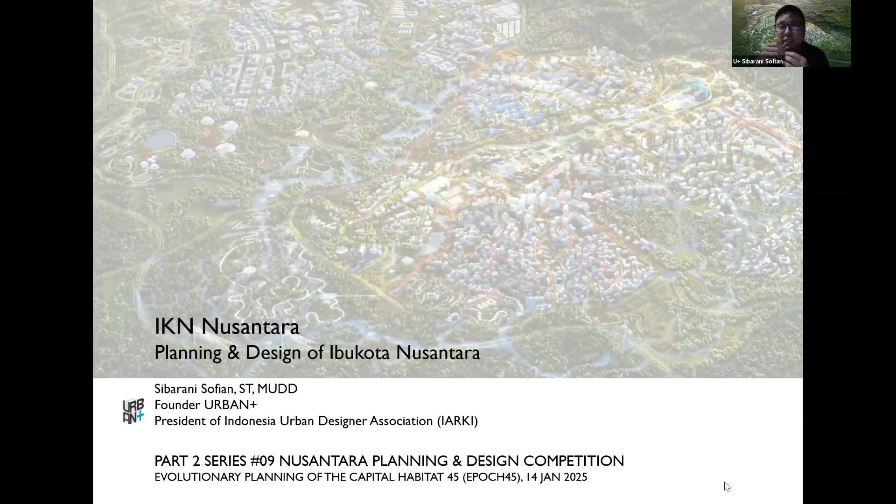Thank you, Neville, and hi everyone. Thank you very much for the opportunity, and hello Bu Wiwi, and also all the other participants here. Thank you for the generous introduction, and I hope I can fulfill some of the requests that Neville just mentioned.

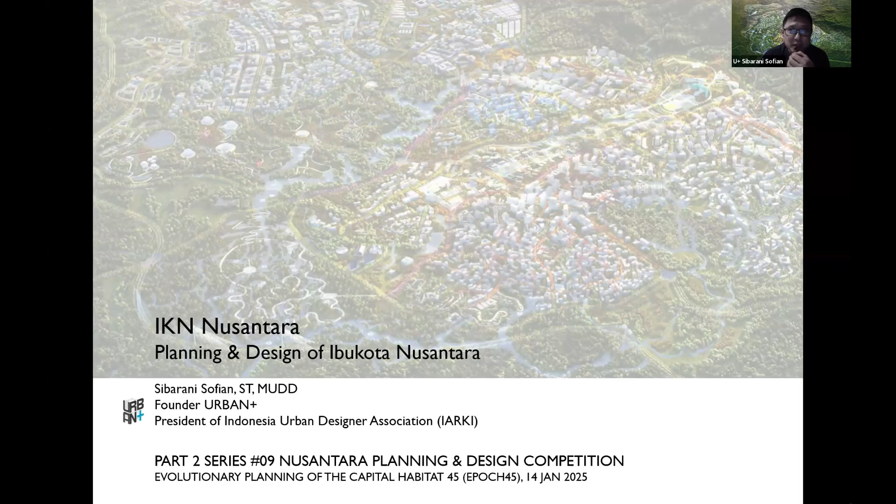I believe some of you probably this is not the first time to look into this presentation, and I hope this is not going to be too boring for you because I've been giving this type of talk for quite some time. It's been 5 years since we entered the competition and won it, and I think it's been a great journey for all of us as a team. Personally, when we won the competition and seeing some things already progressing - I hope in this opportunity I can share with you the planning and the design, and how much it has been transformed into what has been implemented on the site.

Without further ado, I'll probably skip through some of this pretty early information. I think we all know the location and also why the government is thinking of moving this into the more central and less Java-centric location of Kalimantan.

For our former president, Joko Widodo, it's not only moving a capital city, but it's also a transformation of the civilization. So we look into the Indonesia Maju, or Forward Indonesia 2045, where we foresee ourselves to become a developed nation by then.

This capital city is part of the effort to transform the society - not only the physical things, but also the society of us Indonesians - towards the goals of a forward-looking nation. It's based on three pillars, reflecting national identity, which I think is part and parcel of what the capital city is all about.

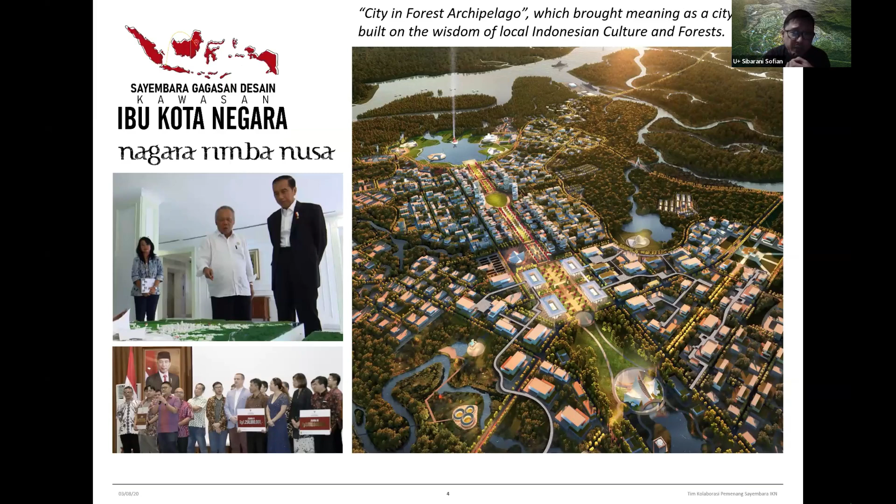They are all the KPIs that become the brief for us. It's almost like when we are architects and planners, we were given a brief by the competition that we have to achieve all those. And this is the competition entry that we were selected for and we won, and also won numerous awards after that.

Just to give you an idea of the second and third entries, and also the original TOR provided by PUPR, similar brief, similar target, similar KPIs, but it can be very drastically different. The right corner image is from the second winner, the Infinite City, from the Cornell University team, and the bottom right is the third winner, which has elements of Harvard graduates and alumni as participants.

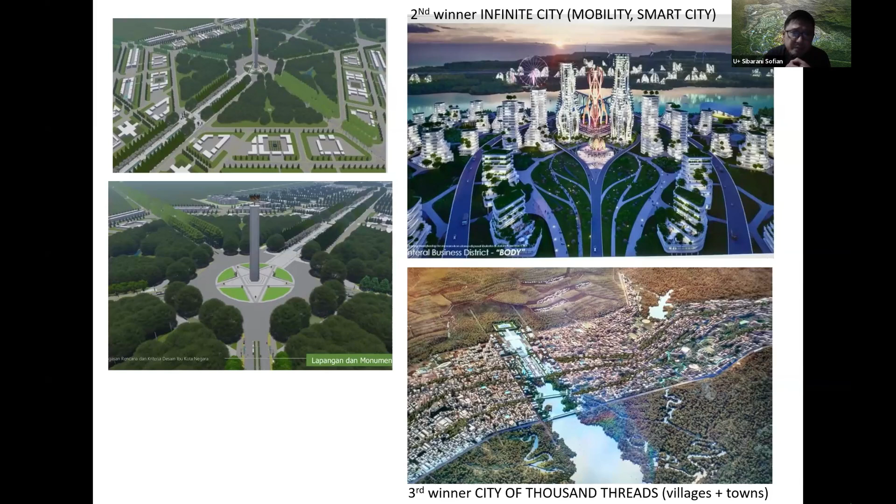So if you look at it, it's the same brief, the same capital city notion, but translated in a very different way. What I'm saying is, within the same parameters, we can come up with various designs and solutions. One of the solutions we made was trying to translate those targets into a physical plan that can be implemented in a certain way.

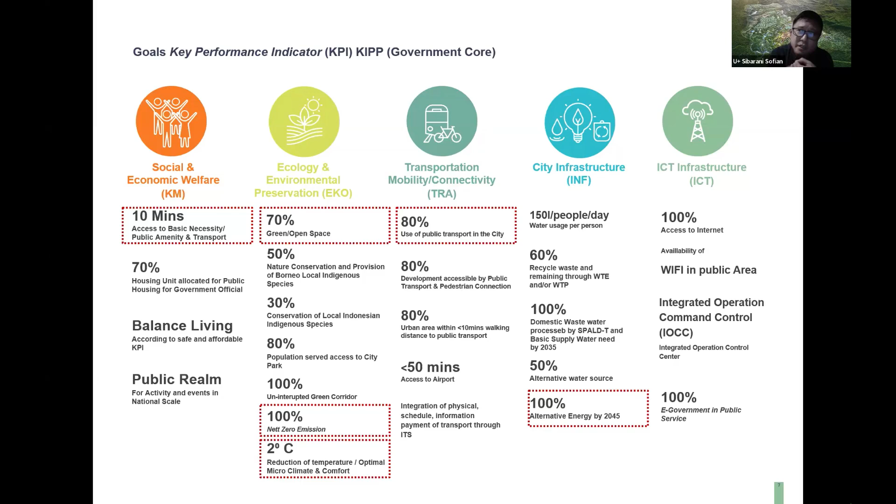So it has a very ambitious and high standard that most cities in Indonesia, if not in the world, have not really achieved. This is almost what I call utopian targets—targets far in the future, but we are striving to get there, and we'll see how this relates to what it's going to look like, and how we embed all these targets into the physical transformation and physical attributes of the plan itself.

Within this talk, I'm going to cover two different areas: one is how to interpret the vision, goals, and targets—the KPIs—and how we respond to nature. Our scheme is called Nagara Rimba Nusa, which is now pretty much translated as Nusantara. It's essentially a city situated within nature or forest, in a constellation of the archipelago.

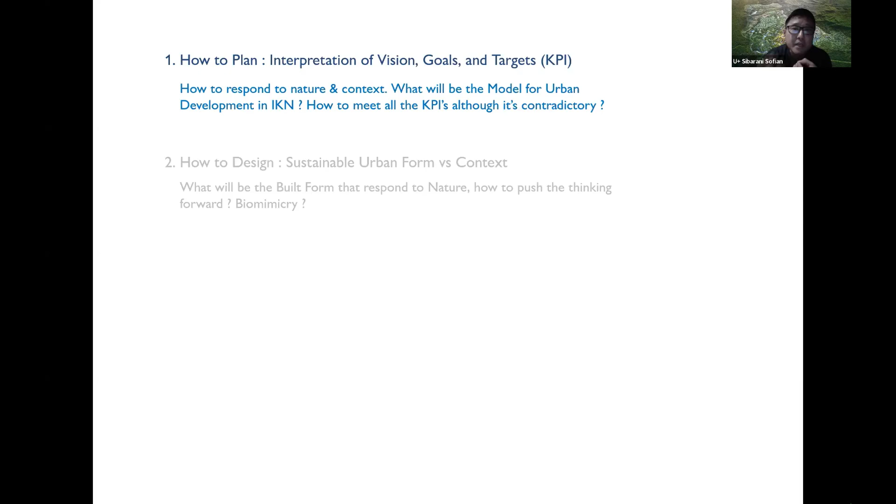So within that, we talk about the model for urban development in the IKN, and hopefully this becomes a model for the rest of the cities in the IKN, and also a model for other cities in Indonesia to be inspired from. So then how can we talk about the KPI that doesn't always correspond similarly with others, because some of the KPIs contradict each other. Later on, I'm going to talk about the sustainable urban form in context.

So by looking into the contour here, our first principle is to be sensitive to it. We need to be able to preserve as much as possible, especially the high points. We don't touch the high points, and we also don't touch the low points.

We keep most of the riparian areas, and you probably can see in recent YouTube videos that there's already a lot of waterway within the capital city. That's the result of our approach - we don't want to build on the area that is meant for water, and that also becomes a solution for us to keep a lot of the water as storage.

The third approach is the road network that is responsive to the topography. This is something that may be more similar to Bandung Utara, North Bandung. It's not really like Jakarta which is flat - it's probably closer to Bogor or Malang. The road system has to follow the contour instead of going against it.

So we are doing as much as we can to connect them, interconnect them, because remember, one of the KPIs we have to meet is the efficiency of public transport. So the road has to be interconnected, but the network is not necessarily always grid or rectangular - it's more meandering, creating a lot of curvy roads that become part of the character of the capital city now.

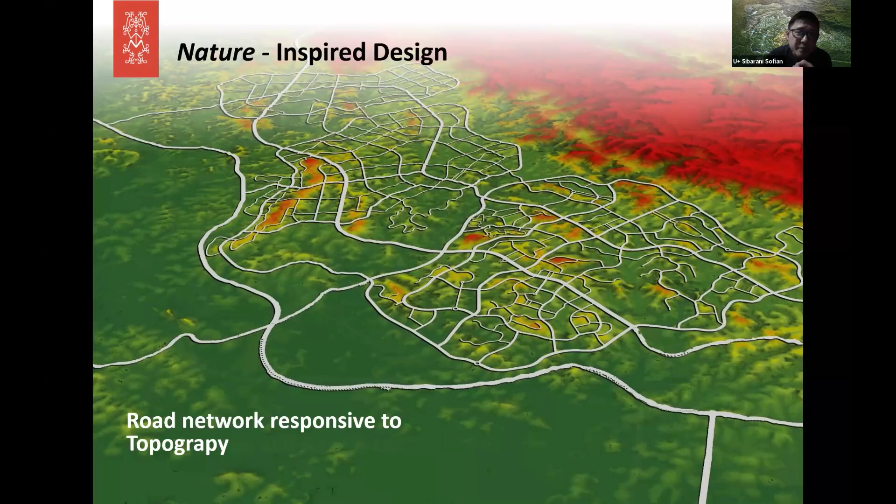We also try to put in certain structures - structures celebrating key spaces where we celebrate the relationship between man, nature, and the higher being, something inherent to our culture. This is something we can find in Bali, in Bandung, in Yogyakarta, in many parts of Indonesia. This wisdom has almost become universal, and that's something we also want to bring to the capital city.

So we have the notion of the axis, which one may relate to Washington DC, Canberra, or Putrajaya. It's become part of the tradition of the capital city to create a certain level of axis, somewhat related to power. But here, it's not necessarily all about power - it's also about the relationship between man and the higher being, man and nature, which in Bali is called Tri Hita Karana, and in many various cultures in Indonesia there is certain belief systems like that too.

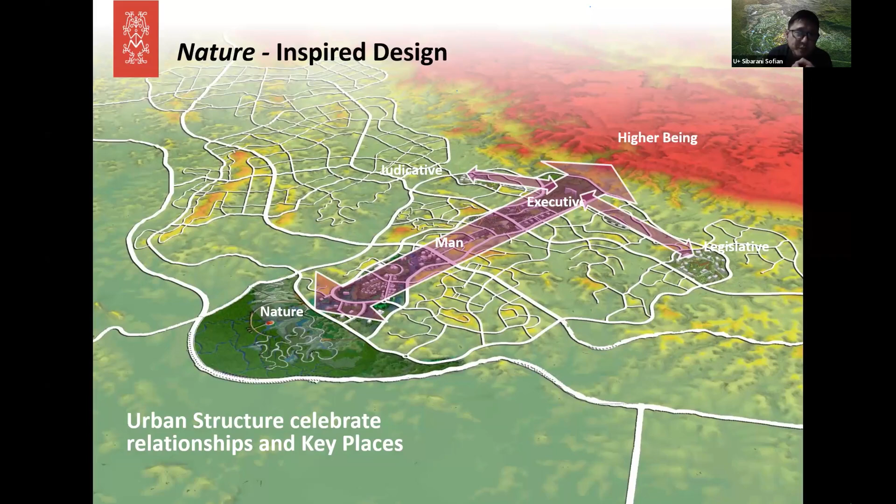And then we go into the next level of the green corridor, which tries to keep as much as possible what we call the flora and fauna corridor, to make sure that even the animals can still have a place to roam around the city. This is something that is missing in our main cities nowadays, because we tend to destroy this sort of ecological corridor, and we've already missed that.

We translate into an even more refined network of green fingers, where we identify most of the riparian areas—the low-lying area you saw a couple slides before—that's something we also want to keep. By doing this, we create almost a constellation of islands of development surrounded by green. This can help us translate the KPI of 70% green area and only 30% developed, because it can be achieved in the form of this organic network.

One can also argue you want to create more green cities by creating a big park in the middle, surrounded by development, like Central Park in New York. But we took the decision to make it more natural because we really want to preserve the environment, and by doing this we can also save a lot of costs of not filling and cutting the land.

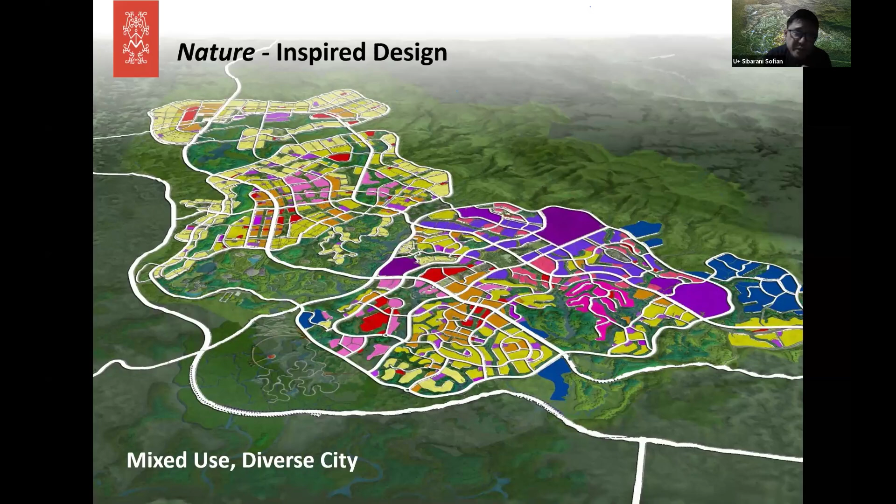I want to mention the contradiction between one KPI and another—for example, the 70% green area, which is very different from our normal city. A normal developer-made city, like Bumi Serpong Damai or Citra Raya, is mostly developed—60% developed, 40% undeveloped. Here it's 70% undeveloped; you only live within the 30%.

But then you need to reach all basic necessities within 10 minutes. How can you do that between one place and another if you have 70% green area separating you from place to place? So that becomes a contradiction.

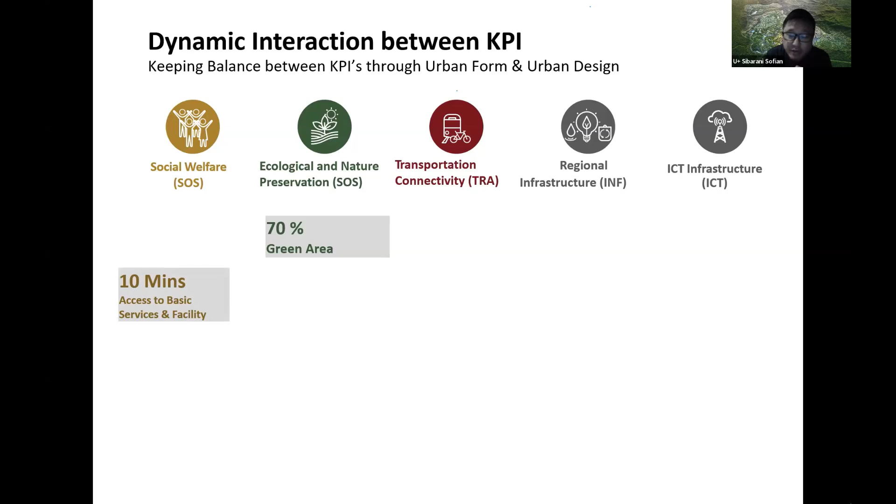And you also need to build an 80% public transport modal share, meaning 8 out of 10 people use public transport—that's another difficulty. If we have so many open spaces intertwining, how can you bring people closer within that 500-meter radius and expect them to walk to and effectively use public transport?

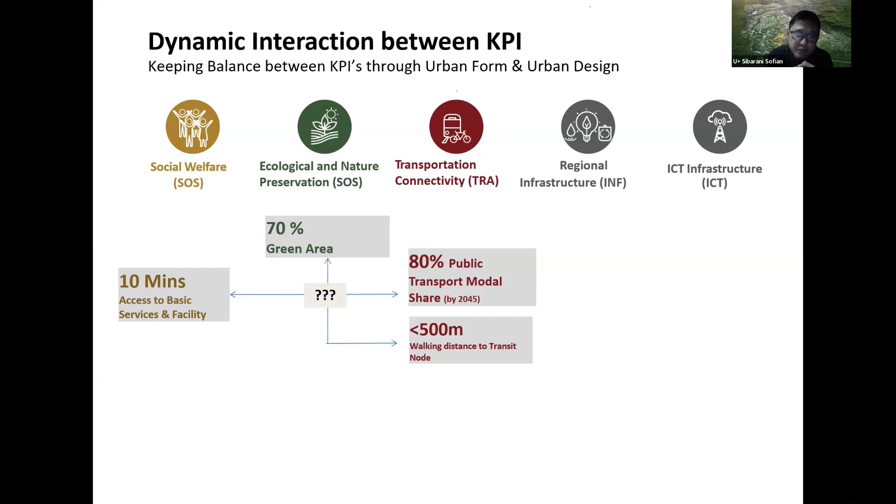So that needs a certain level of rebalancing and adjusting—you need to strike a balance between density and optimal walking transit distance. And we need to be able to measure it. It's not just empty words or an aspirational target; we need to model it and prove that people can really still walk, although separated by a lot of greenery.

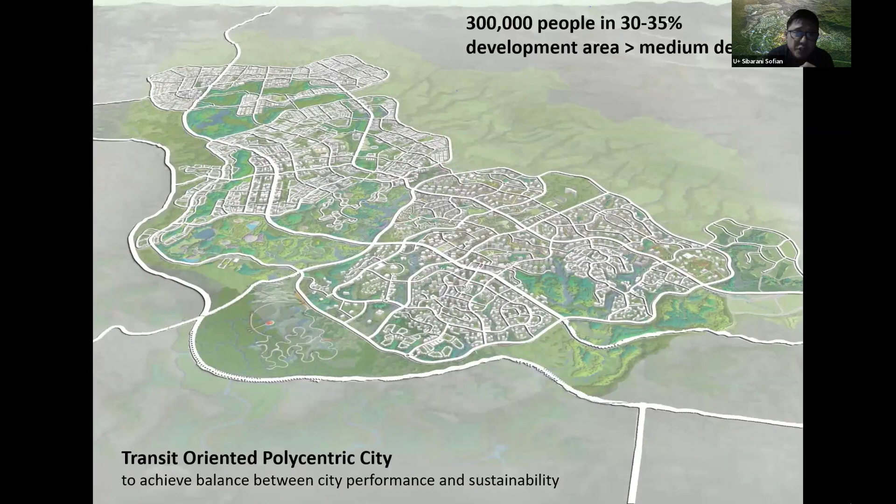So we came up with what we call a transit-oriented polycentric city, combining transit-oriented development with a certain level of polycentricness across multiple nodes. We start with having all public transport routes circulate effectively everywhere—not always straight, but roaming within that parameter. We put in the 10-minute transit radius and build density around it.

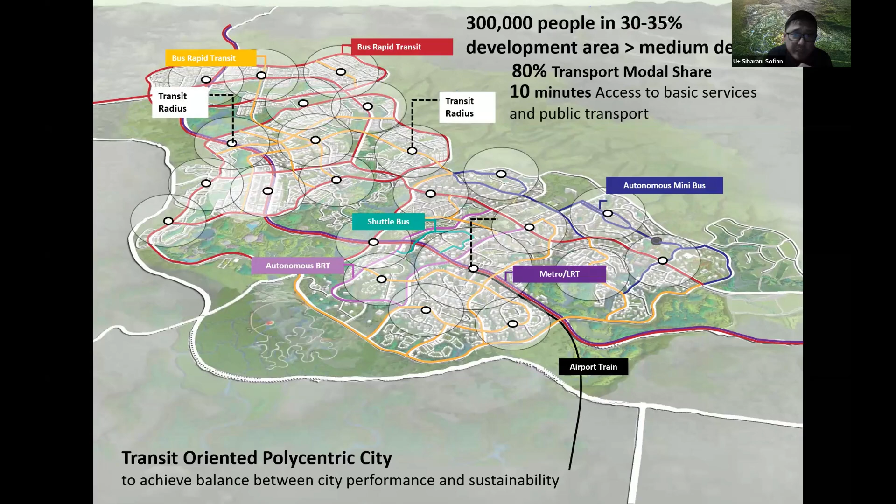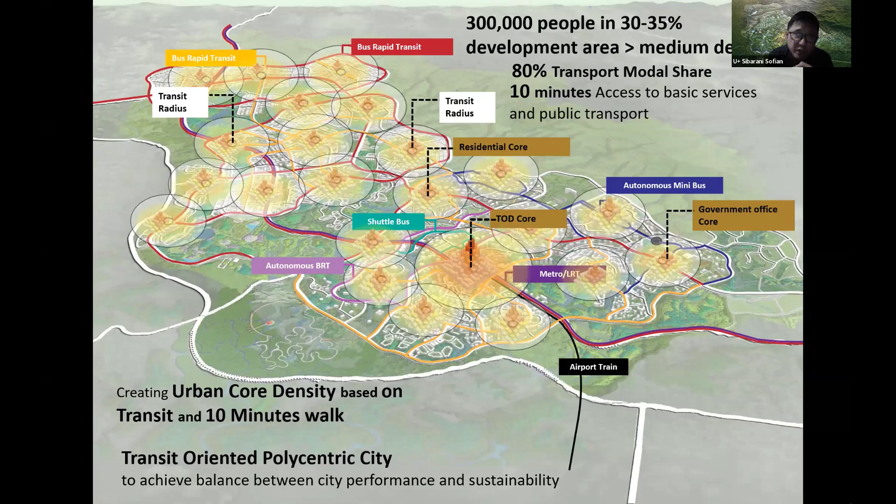We start with public transport first, build density around it, and only then think about the suburban approach. We try to avoid the suburban approach, though we still have to accommodate it at some point—but the majority of development has to be within the transit radius. We incentivize more walking within that radius, promote public transport, and try to limit private vehicle ownership by cutting down the number of parking garages, for example.

That became part of our strategy to create a development we call the 3D: density, design, and diversity. We try to create a 10-minute livable city within the radius of each of the clusters. By doing that, we hope to put pedestrians and people first above motorized vehicles, which consume the most energy, whereas pedestrians create a better lifestyle, healthier, and lower cost.

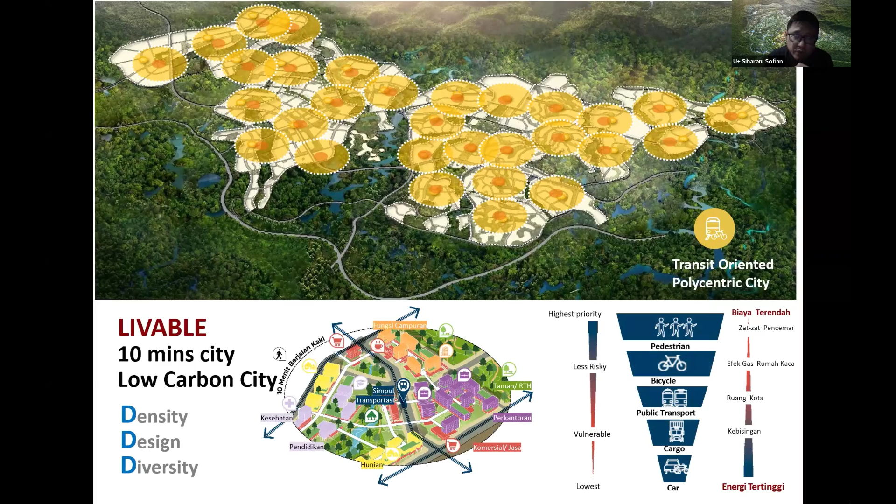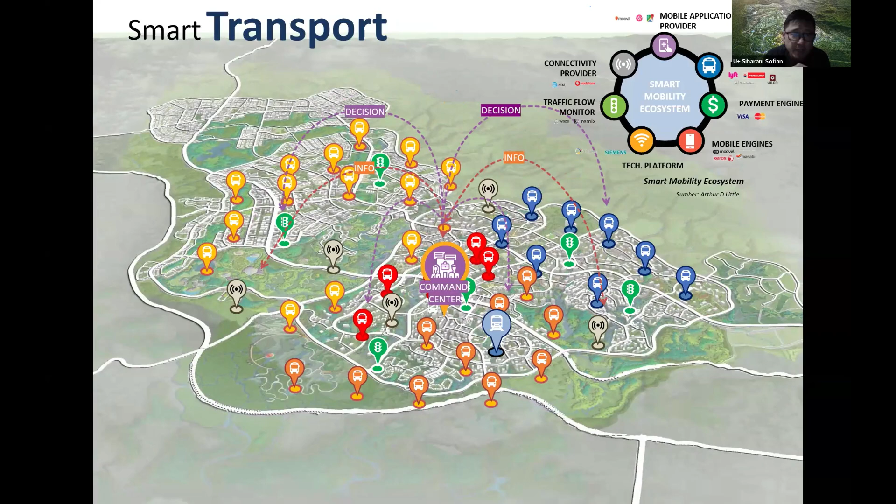We also embedded readily available smart city technology—smart water, smart infrastructure—using the infrastructure corridors we already identified, which have the IT backbone within the smart infrastructure we provide in the multi-utility tunnel we plan for. So that's the first part.

The result is this plan that is now being used by the Otorita of IKN to be implemented. Part of this area in purple is already starting to be available. Some of this yellow area is becoming the second and third cities within the KIPP. More than 70% of this area has already been planned and targeted by the Otorita, working together with various parties including private investors. It looks like all this area will be built within the next 5 years.

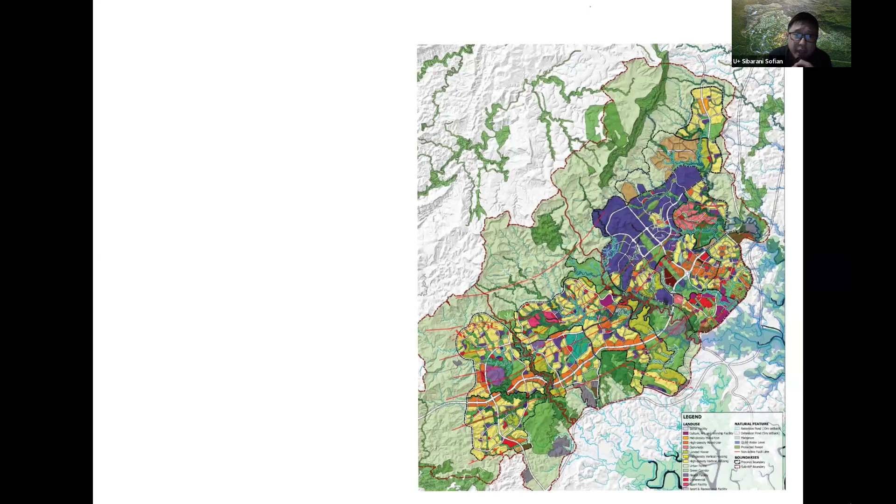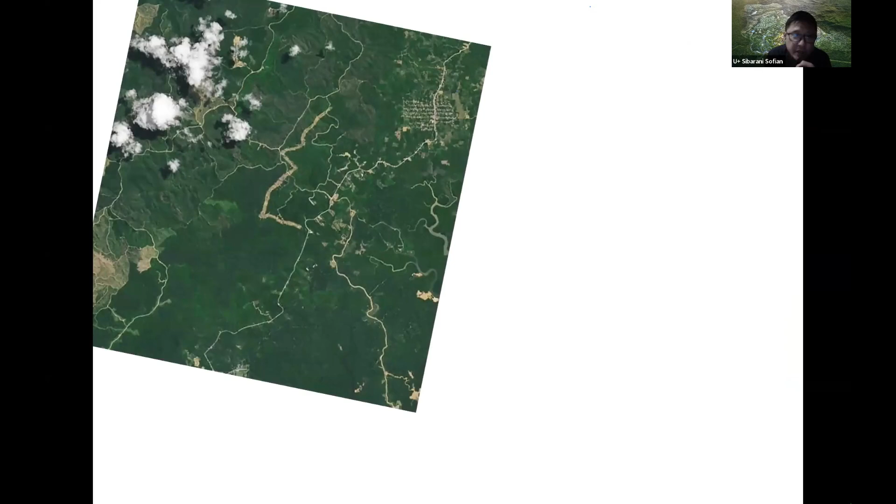Some commitments like Mayapada Hospital, Pakuwon, Pakubuwono, Agung Sedayu Hotel, and Nusantara Hotel are already under construction. When we started this plan in 2022, the land looked like that—some remnants of the road already starting. But that's some of the area we had. Then starting in 2023, you start to see this pattern.

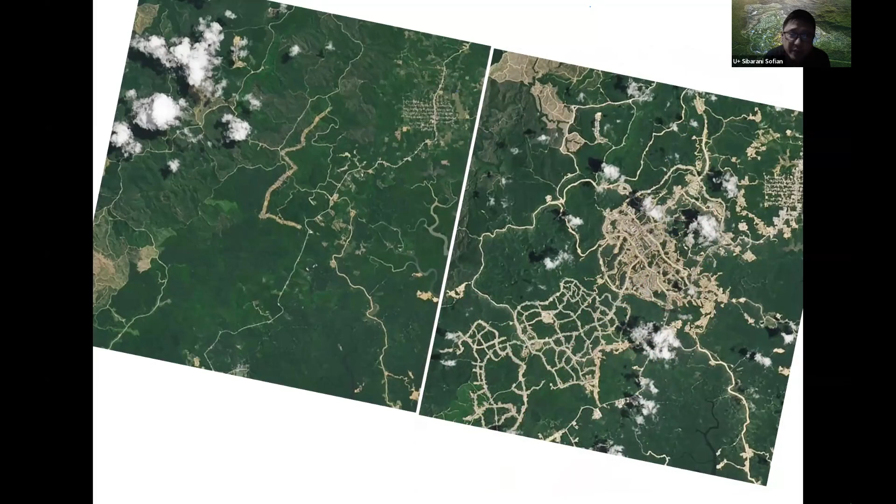Of course, some may say we are destroying the forest. But remember, the majority of this area was already disturbed anyway. So the road system we planned in 2021-22 is being implemented in 2024 and starting to take shape. If you look left and right at the same scale, it's getting there—our government has already started pouring investment and budget into it.

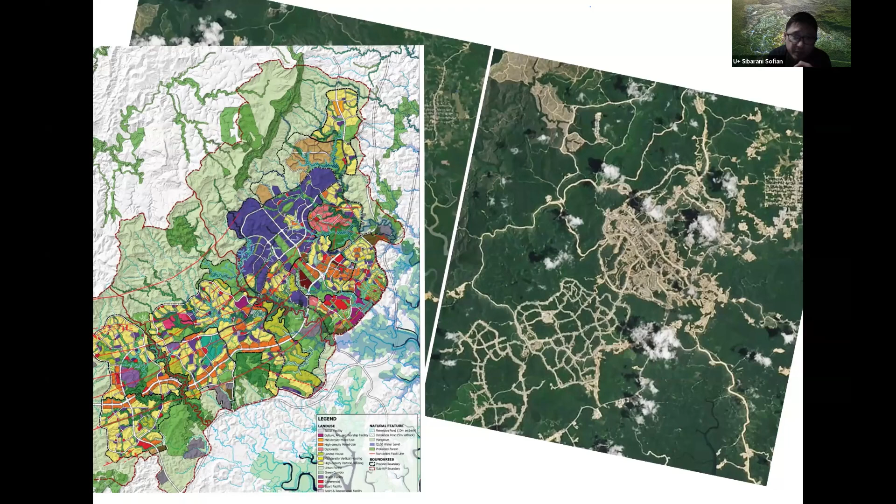So we already started doing this. For those who probably still think the capital city isn't going to happen, or will be stopped by the new government—at this rate, if you look at the development already happening, it's too late to back up. A lot of things are already happening on the ground.

Now let's talk about the second topic, which is the sustainable urban form—more tangible, beyond the big scale of planning. We talk about the built form that responds to nature, and how we push the thinking forward, because we try to create an idea of a forest city, or city in the forest—not a city in the garden, not a city in the park, but city in the forest.

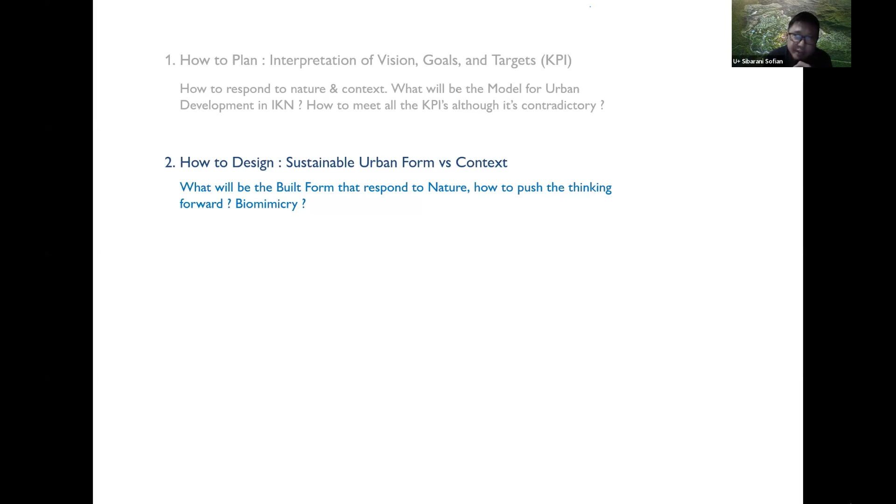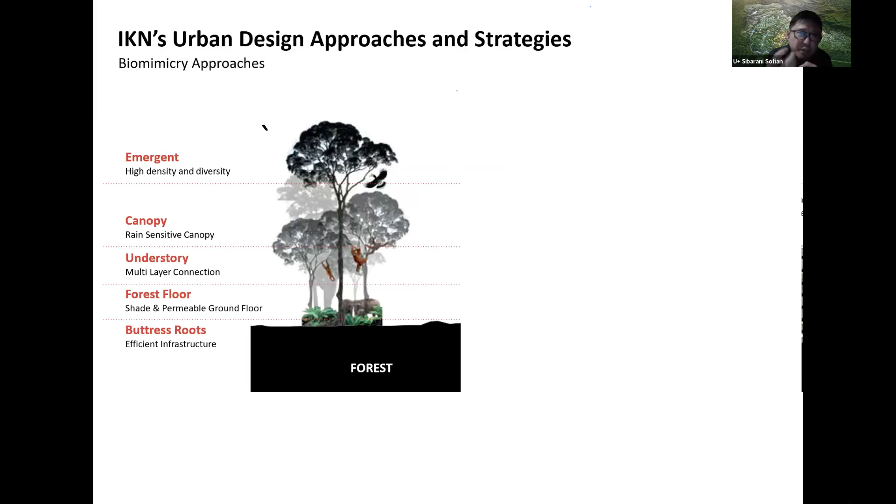And how much nature is what we're talking about—nature here is really the original nature, not just man-made nature. The thick forest of Borneo gives us inspiration for how we can translate that into the built form of the city. So we try to mimic the tropical forest.

We look at the tropical forest's organization and how elements relate to each other—how the plants speak to one another, how the roots distribute nutrients from the top, taking photosynthesis and transferring that into the ground, and how animals connect from one tree to another, jumping between them.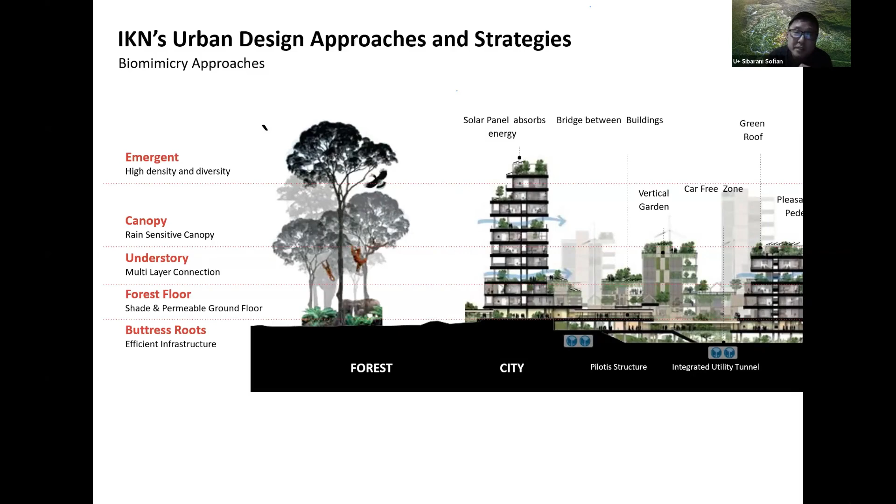We try to use some of those elements in our city, where the top level can be the origin of the energy source, the structure of the building, and the utility can become the conduit for our infrastructure and utilities. The ground level is where a lot of activity can happen, and the interconnectivity between levels, like branches reaching out, is part of how people can move around easily.

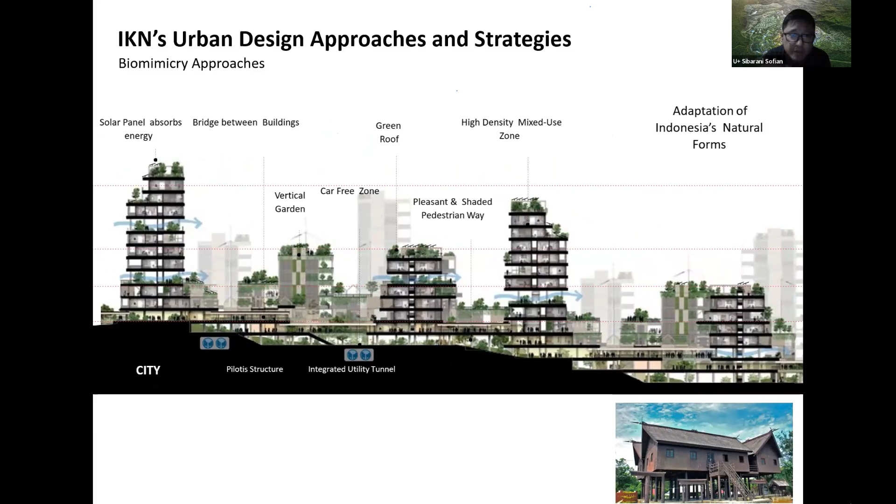You can't expect people to walk up and down, especially if they have difficulty with aging or disabilities. We need to be able to connect from one building to another in the most straightforward way.

We also have the old wisdom, or vernacular wisdom, of the rumah panggung, the housing on stilts, where we allow nature elements, the water and the wind, to penetrate through the base of the building, where we live upstairs, and the animal and nature shared on the ground. This also proved to be more agile and much more earthquake proof.

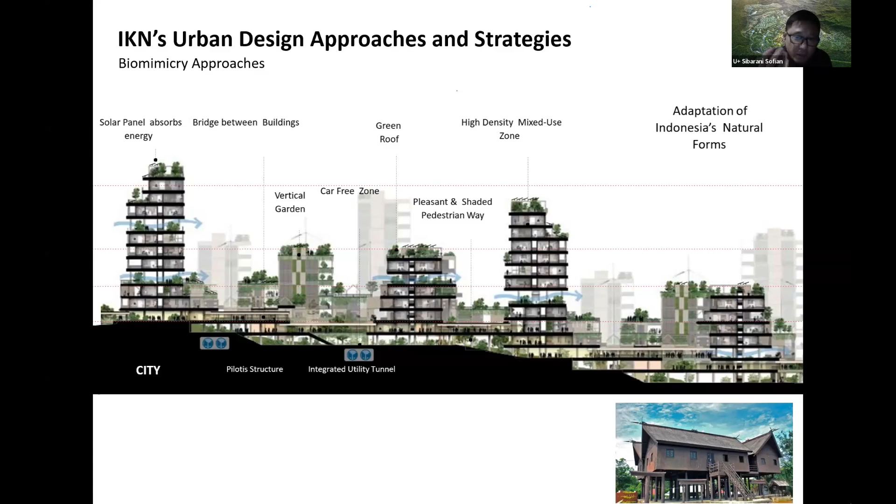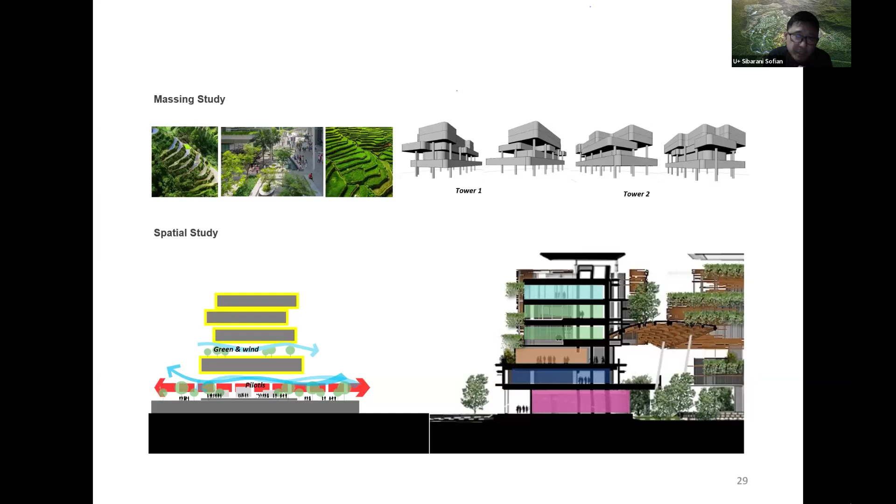Although this area doesn't have any imminent earthquake, we think a lot of the old wisdom can still be embedded into our configuration, translated into how the building can be planned. So we liberate the base of the building to allow for passive cooling, for the wind to penetrate, reducing the energy and fossil fuels from air conditioning and mechanization, using stilts to carefully step into the topography without destroying the shape of the land.

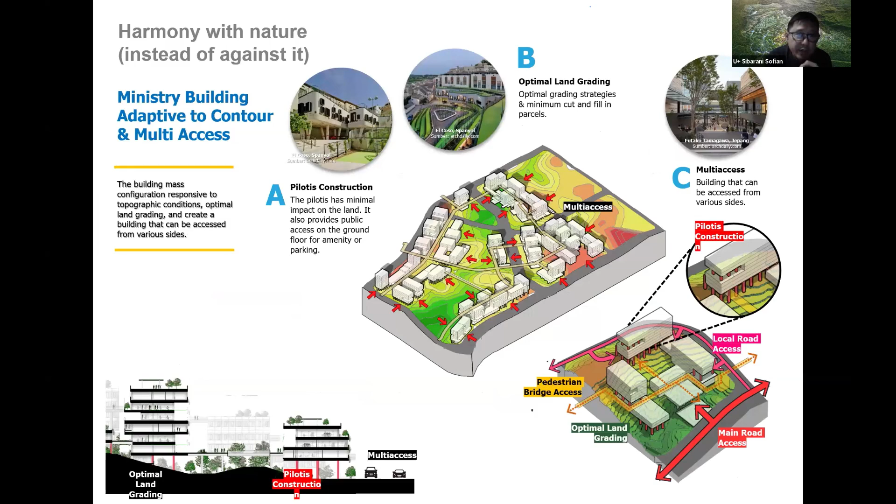You can see in this diagram we try to adapt to the contour, and this is the diagram for the government blocks.

The second one: remember the riparian system, the micro green fingers that we plan, which is part and parcel of the land use plan. Those green areas will stay there forever, at least to the extent of the plan. Within that 10 minutes, you can always achieve this kind of riparian park. It becomes part of the nature-based solution, and also becomes the ecological corridor and bridges between one place and another.

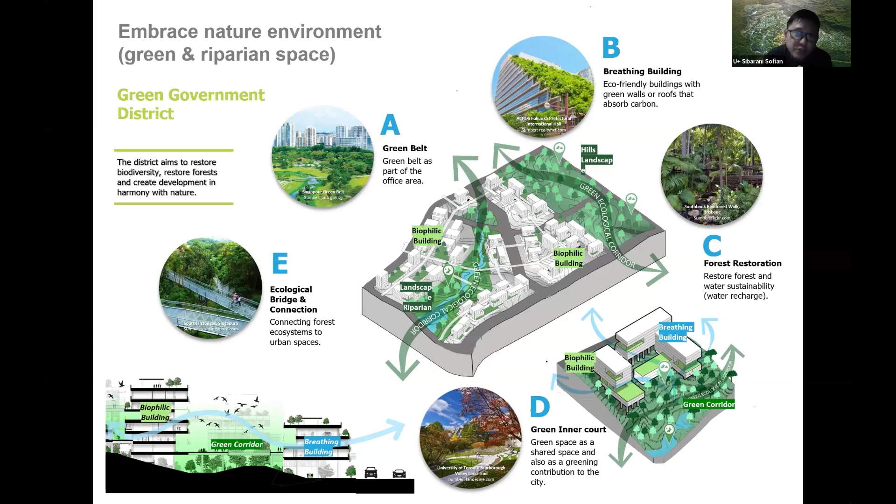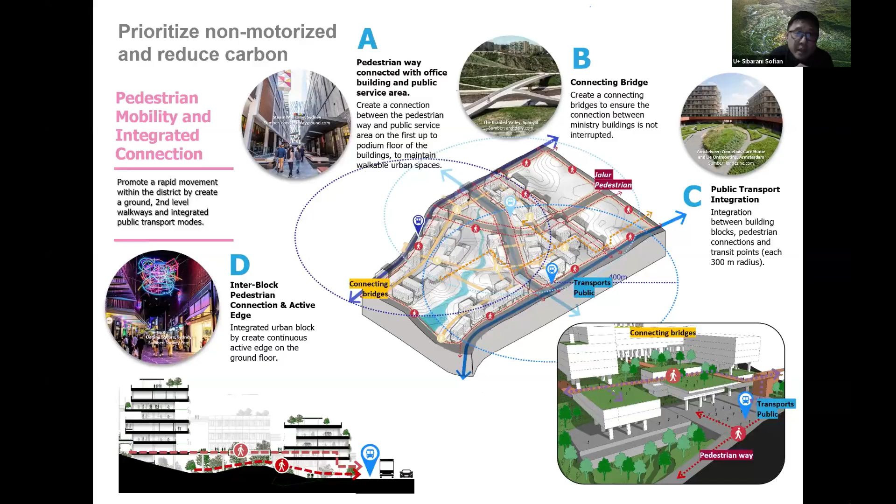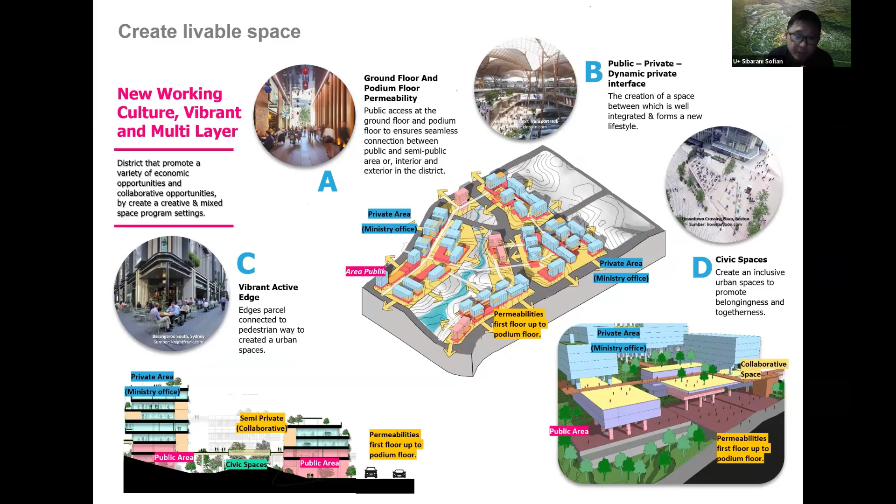The wind can come through and penetrate the base of our buildings, and we create micro mobility and integrated connectivity between public transport and inter-building links. Connecting one building to another in the most direct way will incentivize people to walk instead of going around, and also activating the ground floor to be multi-layered, filled with vibrancy and public accessible uses, again to incentivize walking and public service initiatives.

By doing that, we came up with the first draft of what we call Kemenko, the coordinating ministry complex in front of the palace, and the civic plaza in front of it, similar to what we call alun-alun in many of our cities in Indonesia, the gathering place for the people, the congregation for the public to come in.

By 2024, the similar rendering is already transformed into something that is already built. This is already happening, guys. I think what we want to see is whether this works as we envisioned.

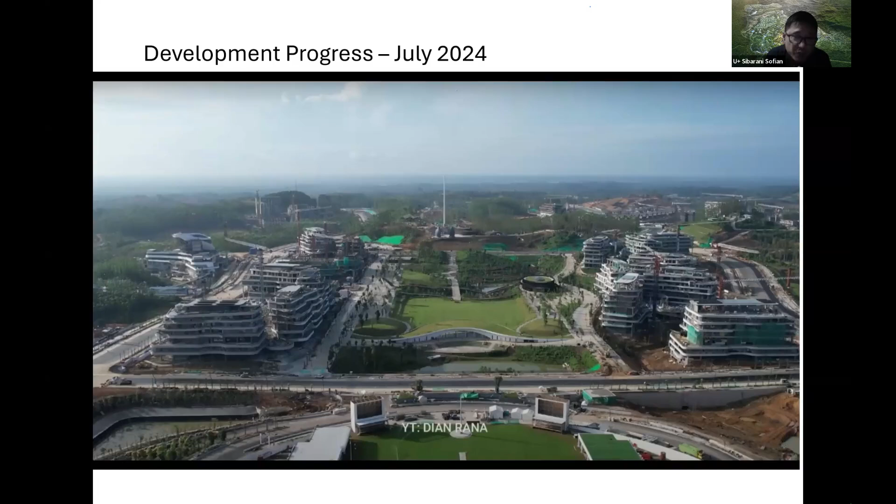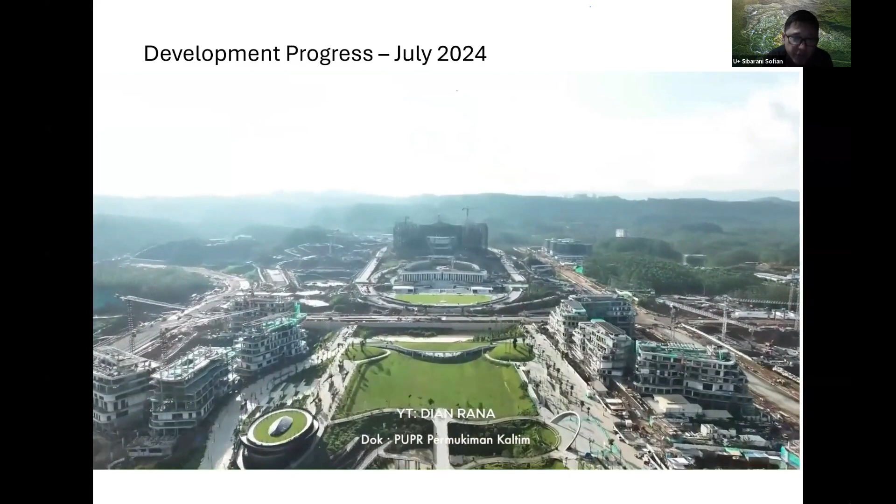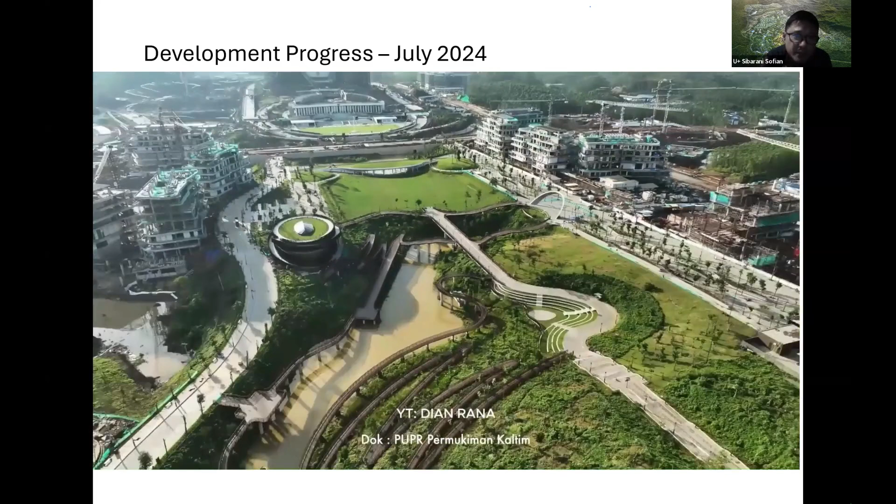If you look at the nature concept of the green finger, where we keep a lot of the riparian with minimal changes to the contour, our Civic Plaza, unlike Washington D.C. which is straight and very formal, is much more naturalistic. It's a mix of forests, waterways, and terraces, which is distinctly us, Nusantara in Indonesia. I hope this becomes a model for the new capital city that embraces nature features more.

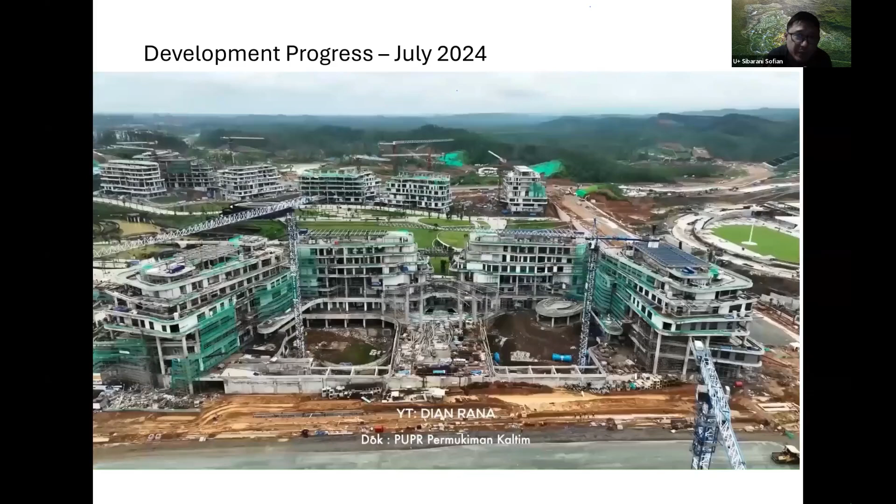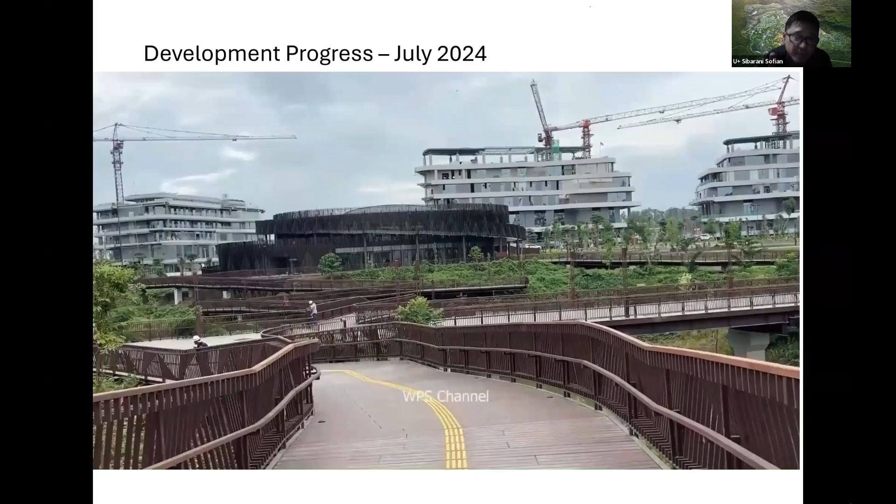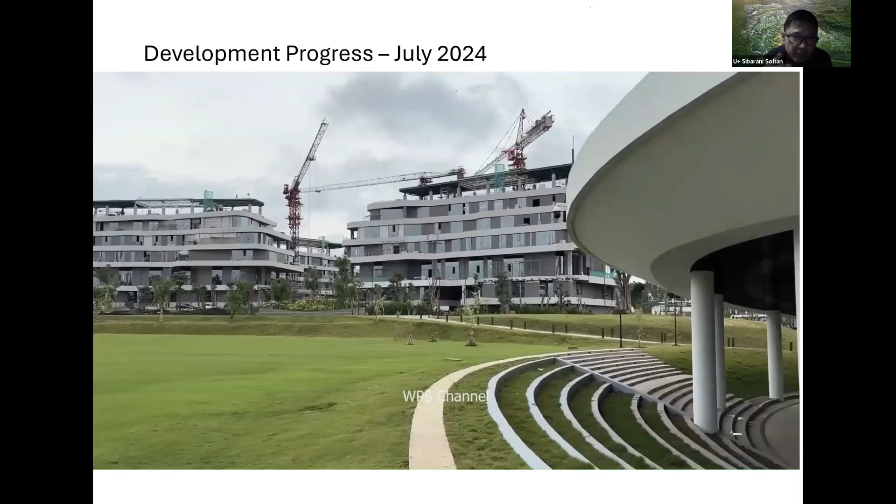A lot of our buildings are already planned for passive design, and we use CFD analysis to model the wind. We also make sure the performance of the 10-minute city can be achieved using urban network analysis and pedestrian modeling. The space is green, not hardscape, so it's not reflecting a lot of heat. We think this becomes part of the solution.

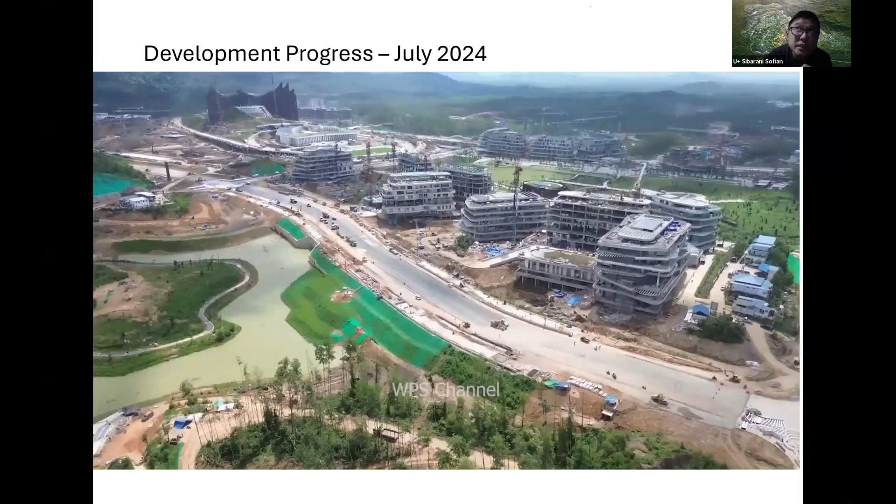If you look at the riparian, the water becomes the element that is retained, and we keep a lot of the riparian natural, so it also becomes water storage for our facilities. That's the kind of aerial rendering of that.

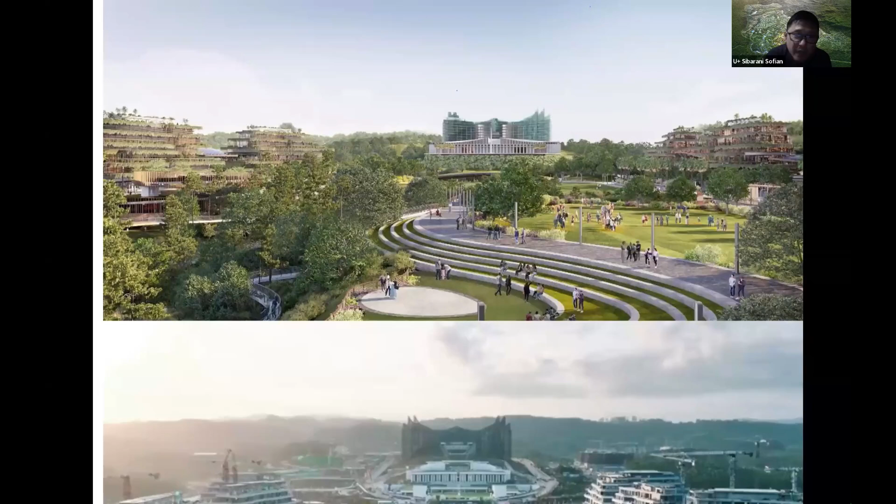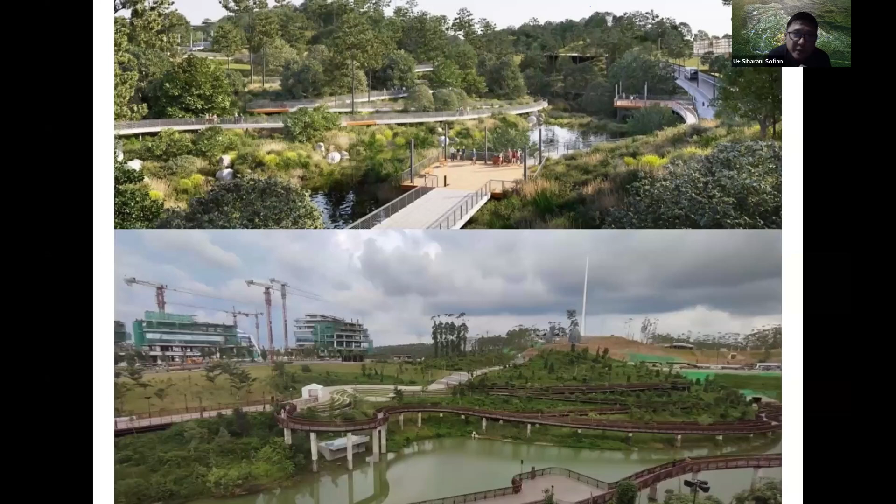From the design we did in 2022, I hope the rendering doesn't lie. The rendering shows what can actually be built on the ground. Of course, a lot of the trees need time to grow, but at least the basic fundamentals of the allowance and allocation are already there.

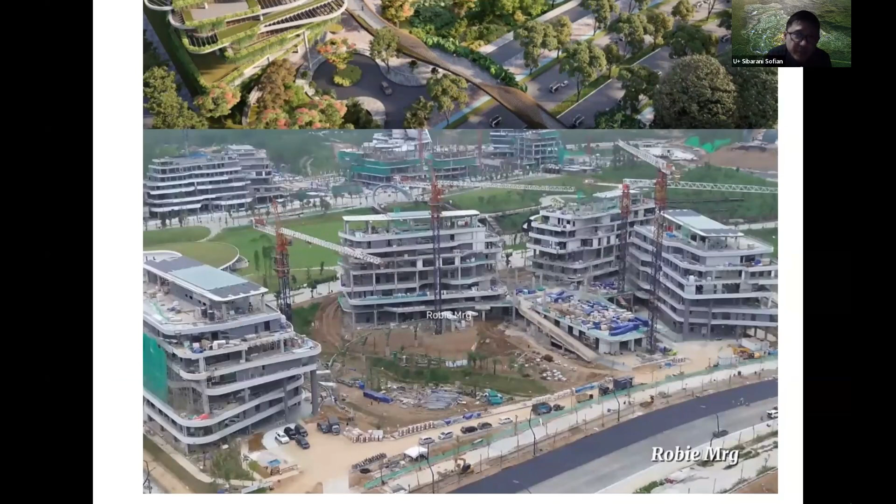Some of this idea of the biomimicry of the building that is more high performing has a lot of cantilever to reduce the heat and also to reduce the need for air conditioning. So a lot of our government buildings can use operable windows, combining air conditioning and natural ventilation.

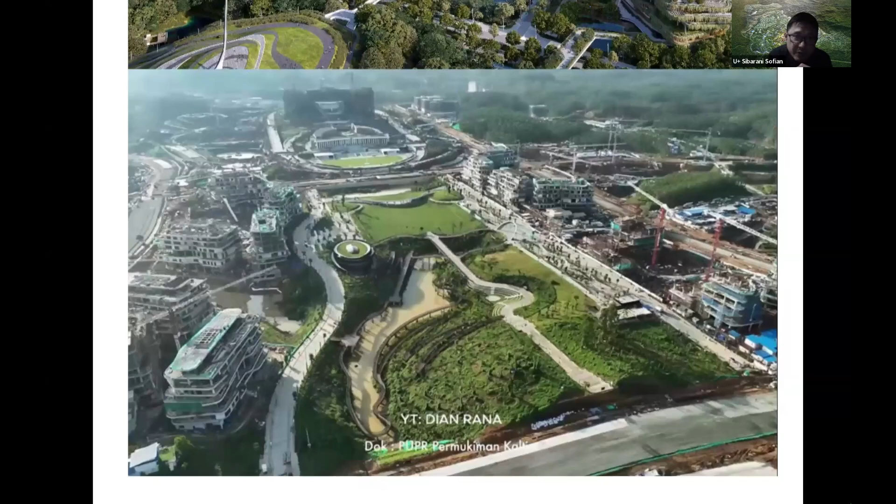And the bridges are also ongoing. The interconnectivity is also starting to happen, and the axis from the palace is already starting to take shape. Just a more recent one that I have seen happening as well.

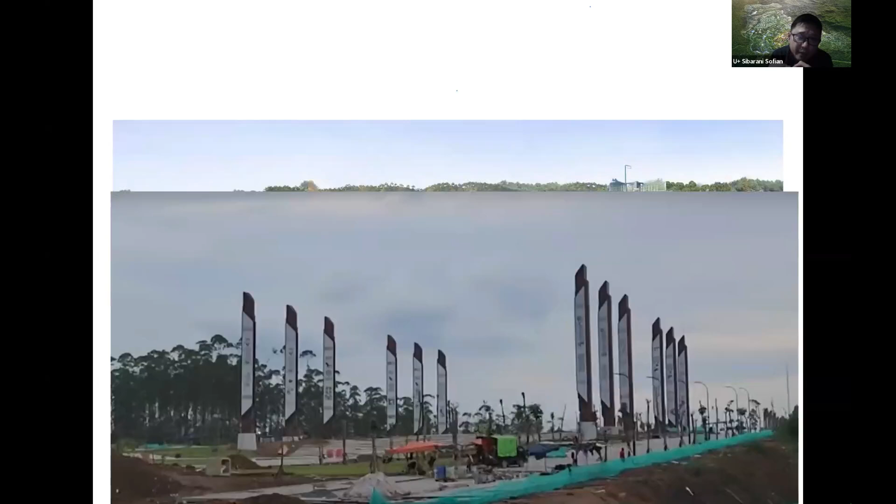This is part of our extension of the axis from the palace all the way to the Tenggara, the southeast. We call it Plaza Bhinneka, where we celebrate the diversity of our 34 different provinces in Indonesia. Now it's no longer 34, but at the time we did it, it was 34, so we mark the date and time when we did the capital city. There were 34 provinces in one location, and that is now starting to take shape, with a lot of symbolism and representation of culture.

So if you look into each of the monuments, there is an inscription of the local symbology, and also ethnic pattern representing the provinces. So all the provinces in Indonesia are represented here.

Well, I think that's it for me, but I guess if I can spare a little more time - Neville, you mentioned how we can put policy into this, how to maintain and configure all these ideas so they can still be managed and adapted in the future. So now we are entering the era of smart city and digital tools.

So what we first do when we do the planning is iterate between urban design, urban planning, transportation, infrastructure, and the land topography and geology, with all the KPIs as a target. But then we keep doing iteration using smart modeling and environmental engineering evaluation.

And with that, of course, there is a draft of the legal drafting of the product. And also there's a new constraint of cost, risk, and time. But then we need to also use a lot of what we call GeoBIM and parametric design to keep enhancing and improving our product.

So at the result, the yellow box shows a dynamic performance-based urban design guideline. It's not a traditional design guideline that's reviewed every 5 years - or at least that's the intention. I don't know whether this is being implemented or not, but with these tools you can manage, control, explore, and monitor the development.

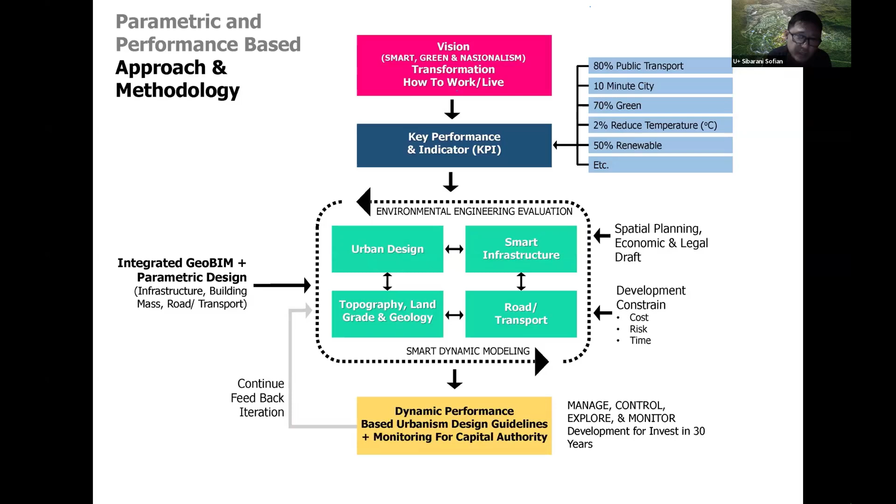And monitor the development and investment in the next 30 years. And this should be adapted by the capital authority.

And of course, we are using different methods and different tools like different softwares - network analysis, IES, and also Rhinoceros and Grasshopper - to not only model it, but also to look into the implementation of it.

And once you've already built it, there are sensors on the ground - climate sensors, disaster sensors, energy sensors, traffic and mobility sensors - to monitor real performance. And it can be live data, using a lot of big data to analyze what you can do in the future, for example, if at a certain point you cannot reach all these high KPIs instantly.

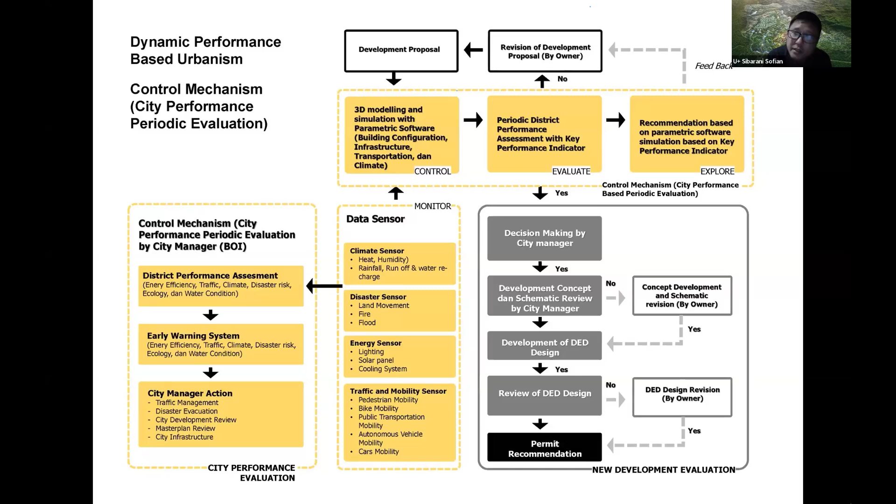But then you can gradually get there. So you use data, tools, and technology to manage your policy. So that's probably how we see and foresee the city of Nusantara progressing in the future, and hopefully that becomes the direction for us to take.

Thank you very much. I'll stop here, and I hope this becomes part of the discussion.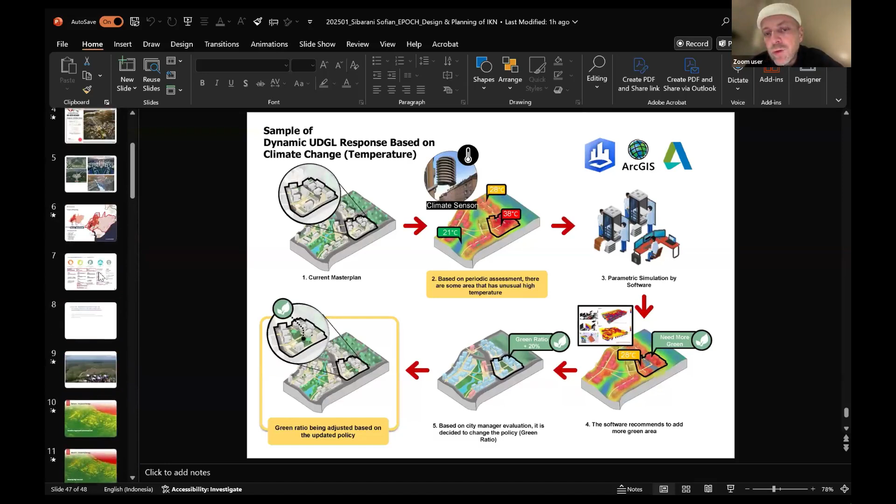A clear vision for, let's say, the nutrients that are going to be consumed in IKN?

If you look at this map and talk about the macro structure of the city, you start to see city numbers 7, 8, and 9 as agriculture industry, the center of farming, and high-tech industry. Number 7 and 8 is the plan for what we call the food estate, agricultural cities, in the area of Samboja. I'm not the person who came up with this location, but what I've been talking about is mostly done by the Ministry of Public Works, which is much more construction and infrastructure related.

But the overall policy is actually done by Bappenas, the Ministry of National Planning. They are more the think tank, more the economic and investment arm of the government that can talk about that level of intervention.

But again, all of that is still in the planning. There is an intention to go there, but implementation right now is very much concentrated on number one, two, and three. We haven't really touched on number 7 and 8, but it is in the document of the long-term plan.

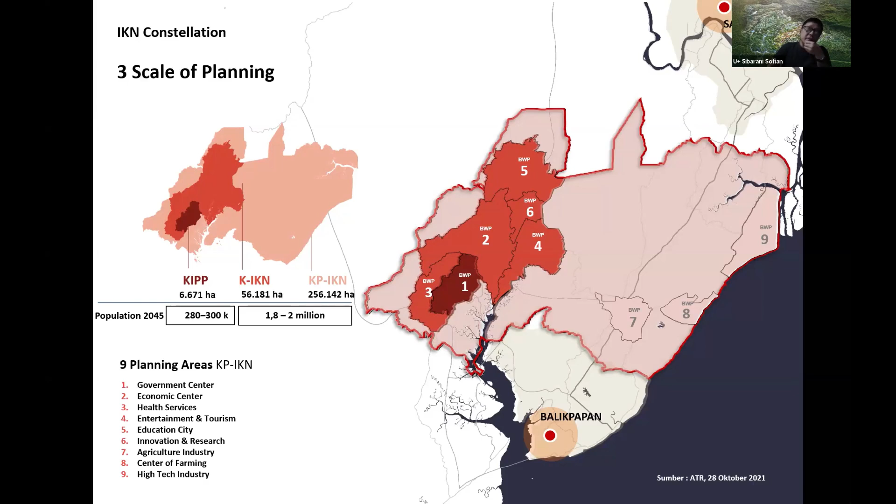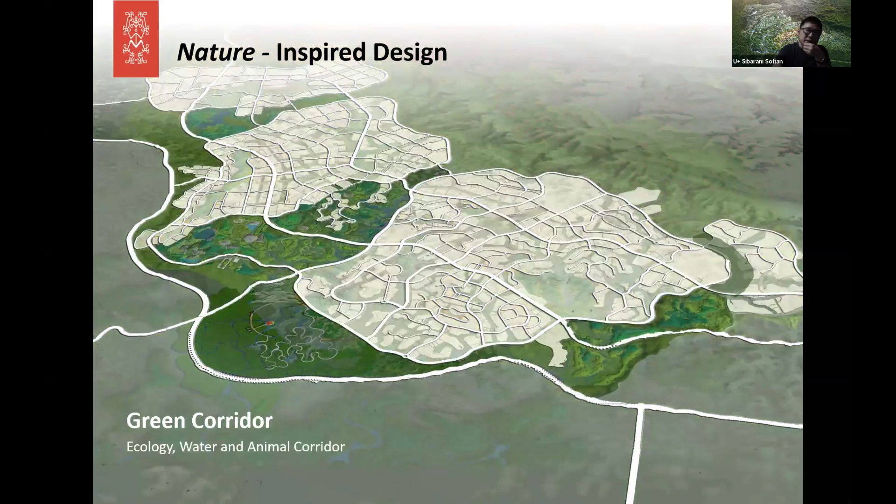In number one, we already have almost 28 small reservoirs. They're all interconnected, all part of the riparian corridor that I showed before. So all that water is already being captured within this corridor, and naturally the water is being collected.

We don't have to put a lot of effort to create a reservoir — we just need to put some dams, some sort of water gate, and the water is already collected there. That becomes part of the source: about 40% of the water can come from surface water, and the other 60% comes from the big reservoir already built in Sepaku, about 7.5 kilometers away from our location.

Interesting. Okay, let me shoot two questions from the chat box at you at once. One is, could you expand on waste management? And the second one is, could you explore this idea of green space and how you envision reforestation and achieving biodiversity?

Yes. Waste management and green space.

Waste management is part and parcel of the fresh water system, where the fresh water comes from. You can see it on the right corner, there's a reservoir that comes from the high level ground. Using gravity, we flow the fresh water all the way down. The reservoir is at an elevation about 70 to 100 meters higher than the city, so it can flow by gravity.

A lot of the waste is also using gravity. A lot of our riparian area is not built, which is also an advantage, so a lot of our waste is collected at the lower point. You see the WWTP there - it's not the exact location, but we have three of them now, each for one city. One of them is already being built. We have an integrated wastewater and solid waste center that can use some of the waste to become energy. It's already been planned, and I think our Ministry of Public Works has done a great job on that.

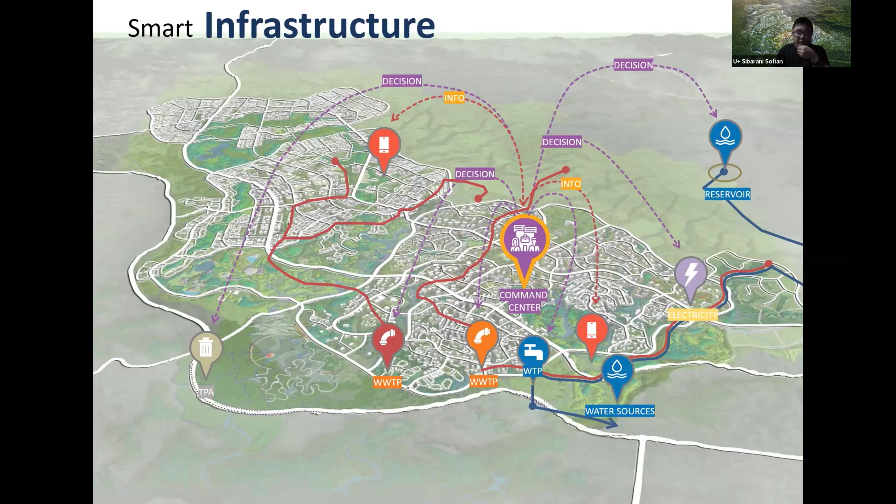If you look at it, there's a big effort to make all the green area - at least 70% - something we don't build on. That's the first thing we've already done. The land use plan mandates that the green area, we end up with 65%, not 70%, at the end of the day. That 65% is embedded into the plan, so nobody can touch it.

But the question you raised is very accurate - it's actually monocultured right now, paper pulp trees, not even a forest yet. We have a huge task in the next 10, 20, 30, 50 years to start replanting and reforesting it with a certain formula to make it natural again, because right now it's not natural. 99% of the land was actually already destroyed in the 90s when we changed the area into paper pulp plantation.

Our job is to transform these green spaces into a series of forests. We're also creating a botanical garden, a plant collection, and ecological corridors throughout the city. So as much as we build the mid-rise towers for government officials, we also have to start planting trees. I think they've already started some...

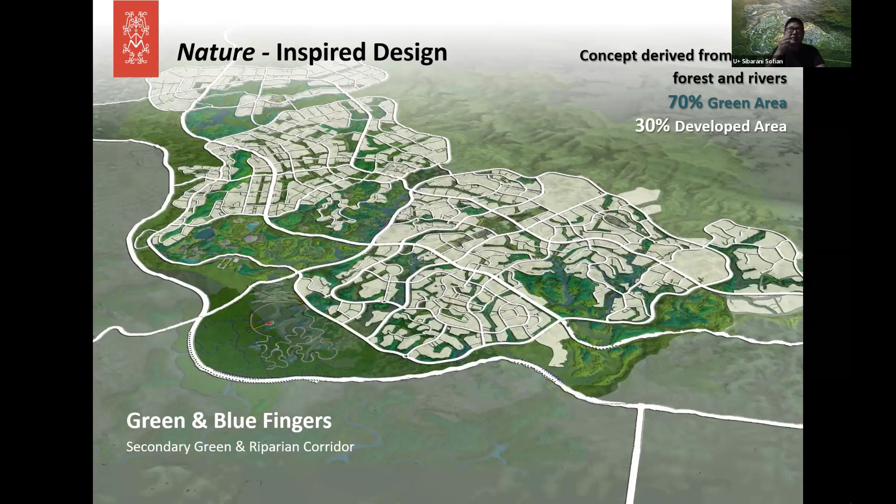The next city should transform, should probably adapt to more local flavor or more local appetite of the investors. Well, what you describe, my first thought is, it sounds like the Desakota.

But rest assured, your city plan does not resemble Singapore or Hong Kong. It's its own thing, and that's really remarkable. I really applaud you for that. That's extremely hard to achieve.

The point you just raised, I'd like to revisit or rephrase, because it's so important. In previous talks we've heard that especially cities from the 50s and 60s with a strong social footing, when they transition to a market-driven city, things tend to go wrong,

and then they need to go full circle and revive again. And you tie that to compactness, and the fact that you need that compactness for public transit to work. All these things are really critical for this design and for the future of IKN. So that's an extremely interesting point.

I don't know if I can even think of an example where mid-rise has been achieved with such a high grade of public transportation use, 80%. I think, if anything, this scheme comes really close to that.